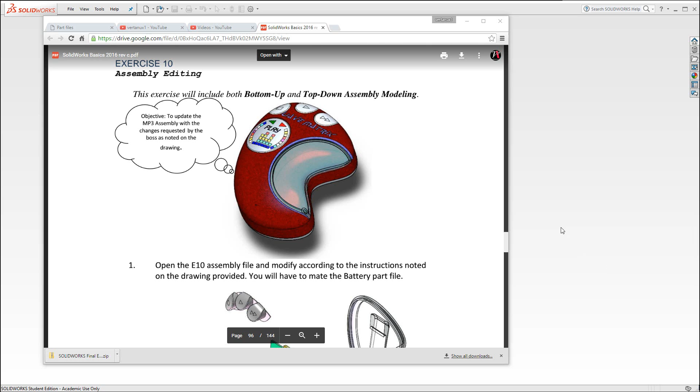So let's take a look at this. First, you want to grab the part files, found under exercise 10 parts, and just download. Once it pops up down here, it's taking a little time. Just hit the little arrow there and show in folder.

There we have the E10, and we could just select all the parts. Now, you don't need the E10XB, that's actually the entire assembly as a neutral file format, so you could deselect that one. Right click, cut them out, and we'll create a new folder here and call it E10. Then just double click in there and paste the files.

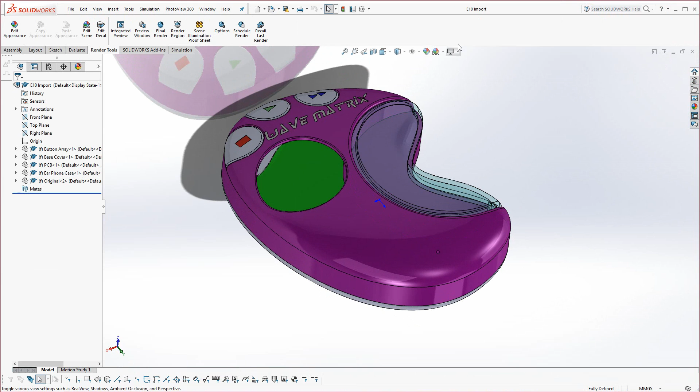So from here, what we're going to do is double click on E10 import. This is the assembly just unfinished. I'm going to turn off shadows because it's basically upside down a bit here.

So here we have it, it's an old MP3 player. Could actually be updated, I suppose, since no one uses MP3 players these days. But anyhow, this is a good example of how to edit something when it's unfinished.

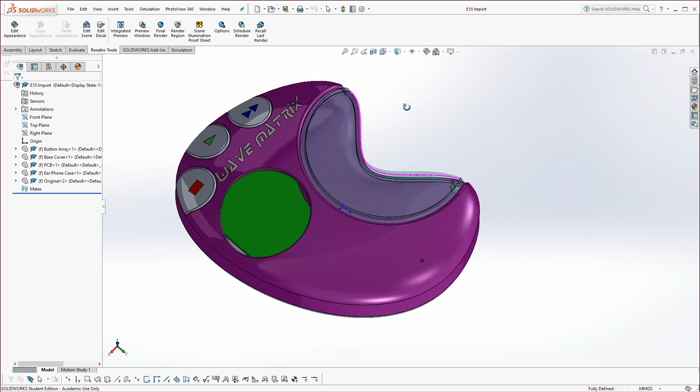If we take a look at the manual, there's actually just one drawing, and it's redlined and marked up. I also have sketches on how it's supposed to look, which is something you don't usually get from a boss. In this case, we look at some of the things he or she asks for: you can model the LCD screen, create this boss to hold the earphone case in position, so it swivels out, as an example.

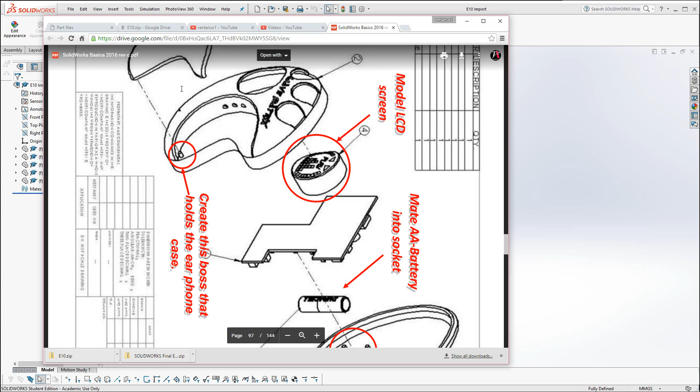But remember, this is kind of a widget. We're not going to go into all the engineering aspects, just more to give you a taste of what it's like to have to edit parts, going in and out of them constantly to finish them off, or things like that.

There's a little bit of bottom-up here. We're going to take a AA battery, which is provided. Over here, we're going to shell this back part out, put a lip around it, and then put those two, the cradle in on that side to hold the battery in position.

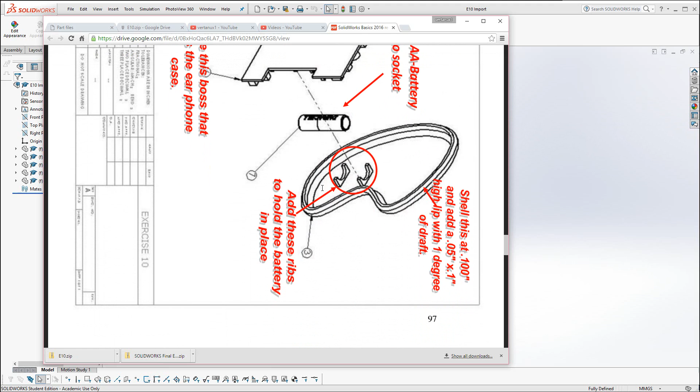So let's begin. Now that we have the assembly up, first of all we could rotate this around the back, and let's hide this part. Just right click on it, and you'll find a little set of eyeglasses, hide component. And here you could see the actual circuit board.

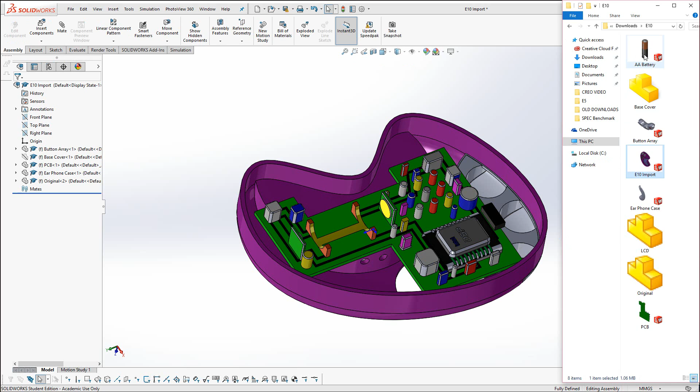Let's bring in the battery. So under assembly, go to insert components, or you could just go right here to the Explorer, and there's our AA battery, just drag it over. I'm going to go to hide/show and turn off the origins, because we don't really need to see them in this one, and the origins are turned on — they might be a little confusing.

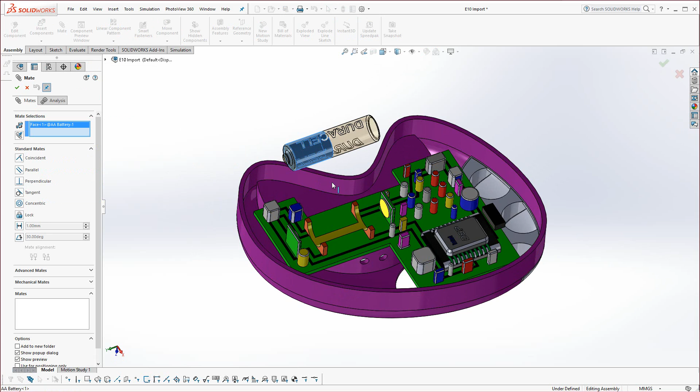Okay, so here I'm going to go ahead and go to mate, select the copper top of the battery, select this yellow cradle surface, and hit the green check. Now go ahead and select this end face to this face right here, and hit the green check.

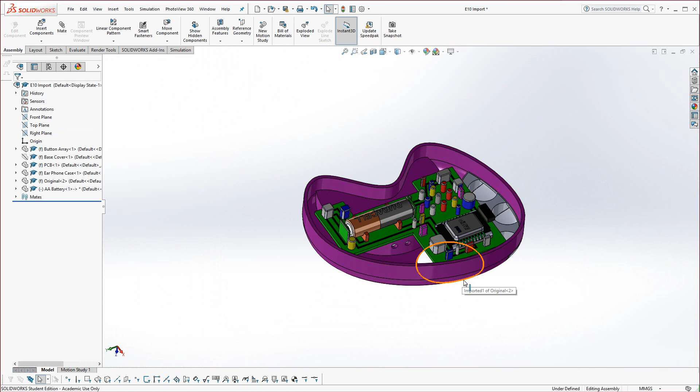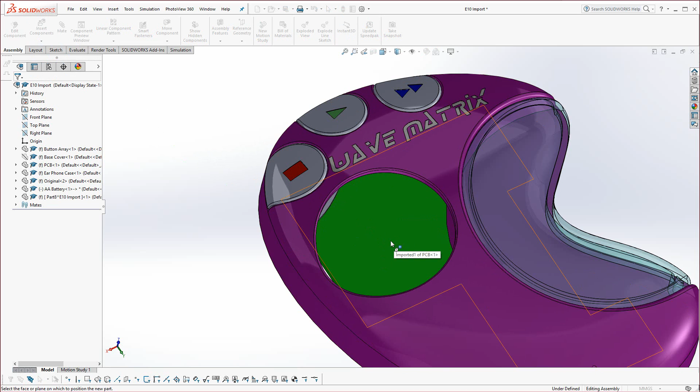Okay, the next thing we're going to do — that part's done. Let's try and build now the LCD screen. All it is is a solid block. We're going to build a solid feature that's going to follow the contour of the shape. So what you could do for that, go to Insert Component, New Part, click on the green surface through the hole, because that's the circuit board, and we want to draw it on there.

Select, and this is where you might want to go to Assembly Transparency and turn on Maintain Transparency. Once you rotate or zoom in and out, it'll take away the transparency — it makes it a little easier to see. You want to capture this edge right here, go ahead and select that inside edge.

We're going to offset entities. I'm going to give it a little bit of clearance, and let's set it to 0.05 millimeters, and hit reverse so it's on the inside versus larger in size.

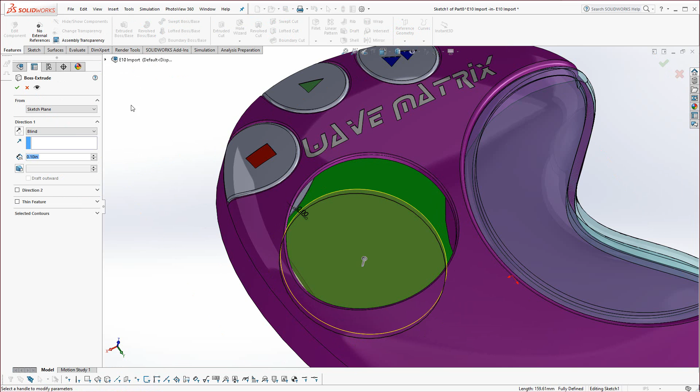We want it smaller. Now I'm just going to go to Features, Extrude Boss Base, and instead of Blind, select Up to Surface, and select this purple surface here of the MP3 player. When it turns pink, you'll see a preview showing that it is extruding up to the surface and it's following the contour. Go ahead and hit the green check mark, and that is our LCD screen.

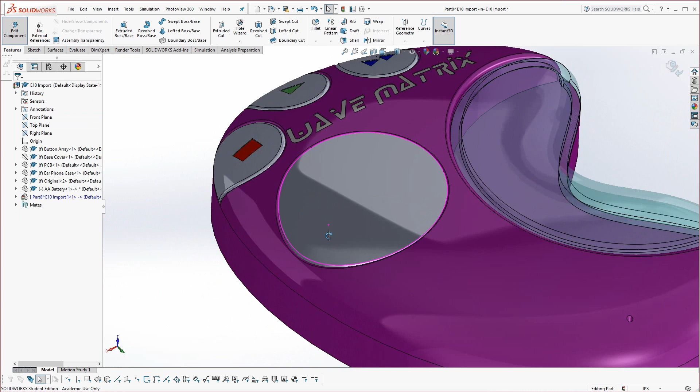Now we could just exit that component. Again, it's just to give you a taste of what things are. You don't have to put all the details in there. So we just essentially modeled a new part on the back side of that circuit board, putting in our LCD screen. Okay, the next thing we want to do is we want to address this area here.

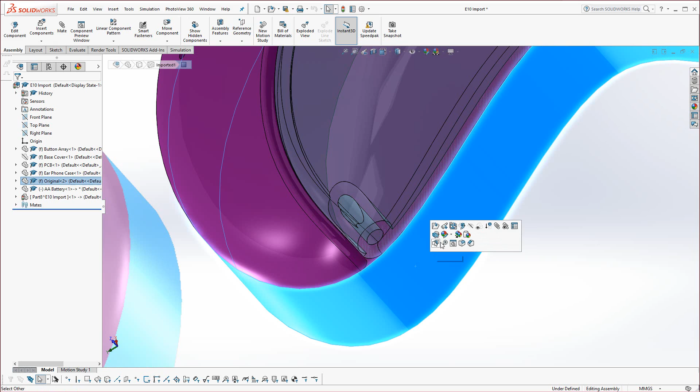Now we need to make a boss that fits in there. So let's edit this part. Click on this part, the purple part, and make sure you go to Edit Part.

Now you can select this face. Note it selects right through. It didn't select the glass shield there, but the earphone case goes right through. The Shift key would allow us to select that transparent object, but we don't want that right now.

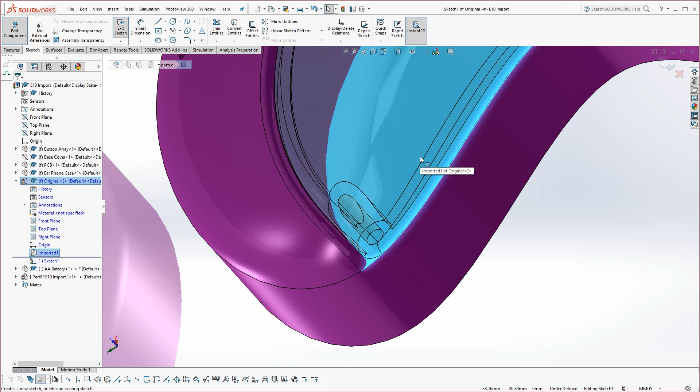So on that flat surface, start a sketch, and now you could hit the space bar and click on the front view or whatever view you want, and zoom up to that region there where you see the actual hinge needs to be. Okay, and what we need to do is we need to turn it to wireframe.

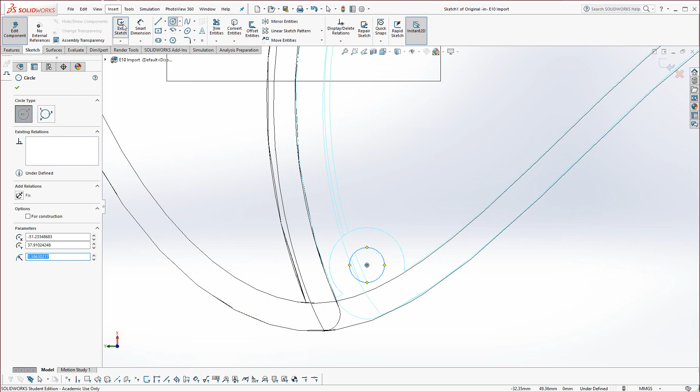Otherwise it doesn't work really well if you try and lock into those edges. So now we could go to circle, and we could wake up that center and just get to the center of that circle and drag this out until it snaps. Go to Smart Dimension, and you can see we're metric. Just set it to 3 millimeters.

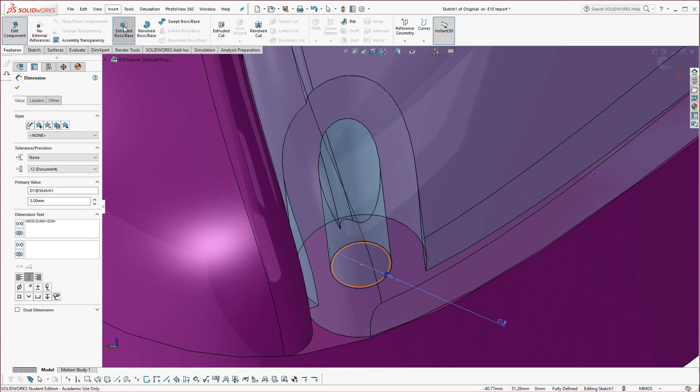And now we're going to go ahead and extrude that up. And we could actually go back now to Shaded with Edges mode, so you can see there we have the profile of the boss that we're about to create. Go to Features, Extrude Boss Base. And in this case, we want to go down to 4 millimeters.

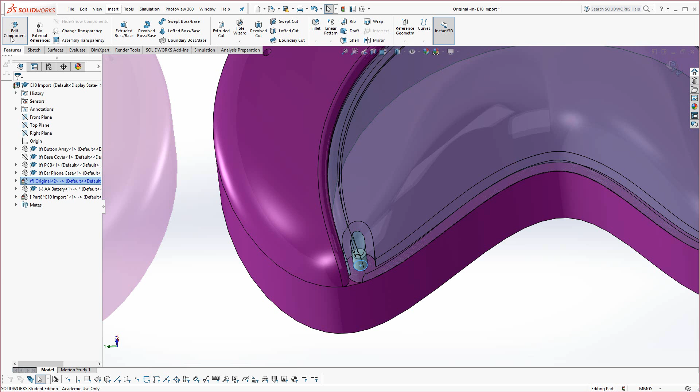Again, we're not going to get into the details of the engineering aspects, like to make a mushroom clip or different things like that. Again, it's just to give you an idea how to use the tools in here inside SolidWorks. Okay, now that we have that done, turn off Edit Component because we no longer want to edit that part. So that's completed now.

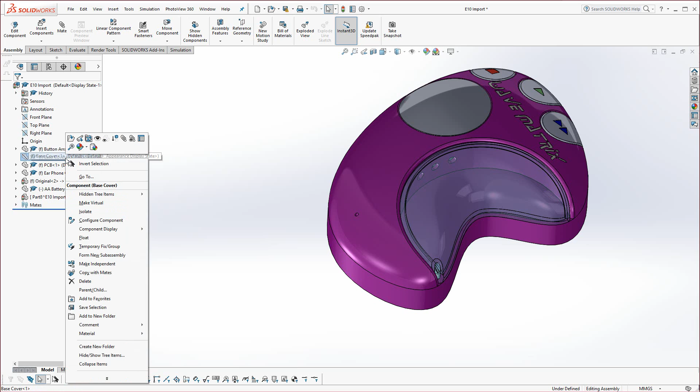The next thing we're going to do is we're going to go ahead and bring back the original 2. If we right click on that... let's see, we want to bring back, there it is, the base cover. So right click on the base cover, click on the show component, which is the eyeball, and now let's hide this part. Click on the purple part and hide that component.

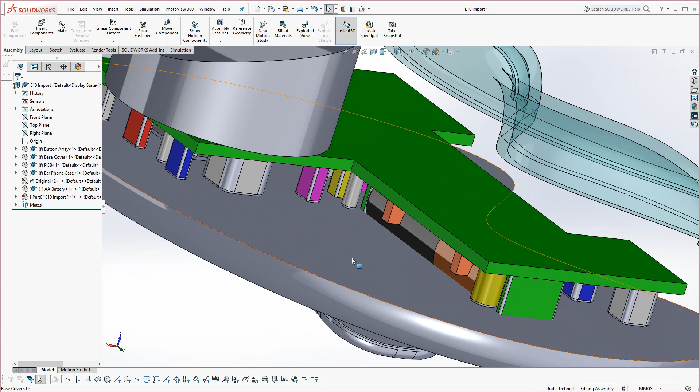We'll keep the circuit board in position, and actually we could keep the rest of it in position. We're fine. You'll see the battery is submerged partially in the actual model of this particular part. So what we could do here is let's shell it.

But first we have to edit that part. So before you go and try and shell it, if you clicked on it right now, if you try to look for the shell command, you won't find it. But if you click on it and then go to Edit Part, now the shell command will appear. Look at that, the base cover now shows up in blue for the text. Thus it's the one being edited.

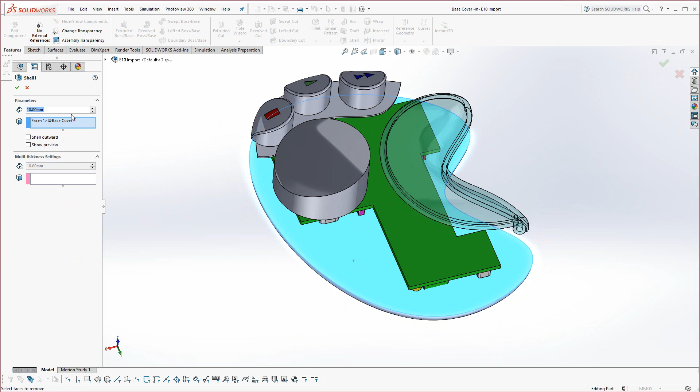So you could select this face again, go to Shell, and it's supposed to be 0.1 inches. So you could type 0.1, and you could actually type IN or the little quotes. Either one will work, and it will automatically convert it for us.

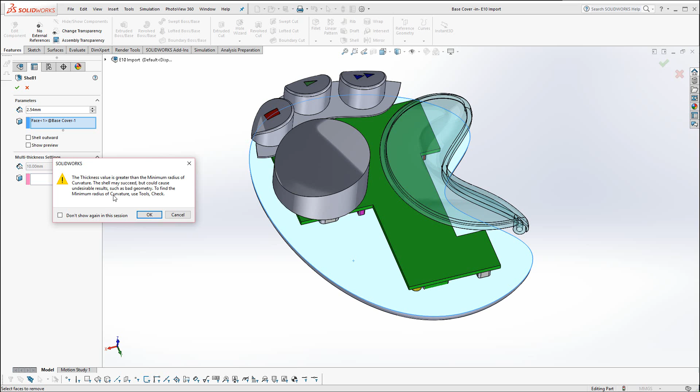Now you might get a little message like this. This is very important, especially with plastic parts. Even though if I hit apply here, it might go through and shell it, and it all looks great, the fact is sometimes the geometry might be, stretch the word, corrupted—meaning that if we were to try and make a cavity out of this for a mold, it might have some issues later on down the road. So let's go ahead and hit OK. That's all right.

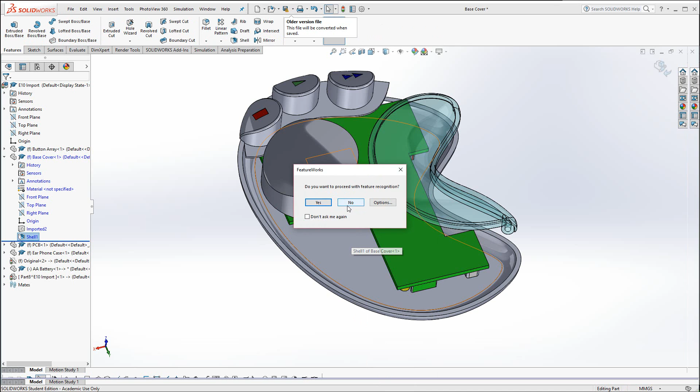Now I'm going to right click on the part and actually open it up by itself, isolating it temporarily from the assembly. It might ask you about feature recognition if you have that add-on, which recognizes features off of dumb solids. In this case, this is an imported model, but I'm going to go ahead and just hit no.

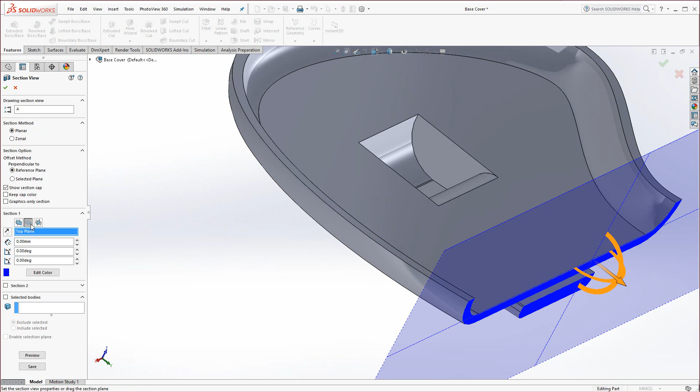And here you can see our geometry. Now what we have here is when we shelled this, it actually shelled out the belt clip that's on the back side, inside here. If we section it, go right over here to section, and let's select the right plane there. With section, you can actually drag through, and what we could see inside there is probably this region here might have some issues where it's kind of folding in on itself. Sometimes things like that happen. It might be that, may not, I'm not certain. But anyway, I'm going to cancel out of that.

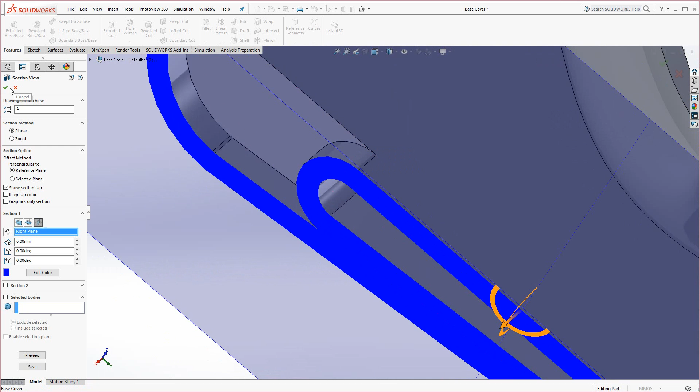So we want to fill that in. Besides, you wouldn't want that undercut there anyway if it's going to be plastic injection molded. Otherwise, you would need a special type of mold that would allow that to be made. To save money, we're probably going to fill it in. But if you fill it in all the way, those of you who know plastic molding, you're going to have a sink mark.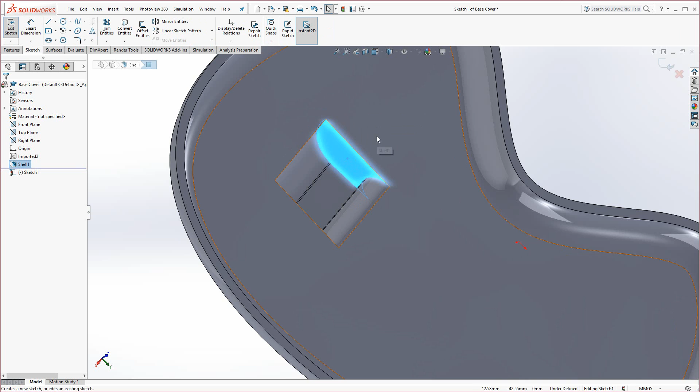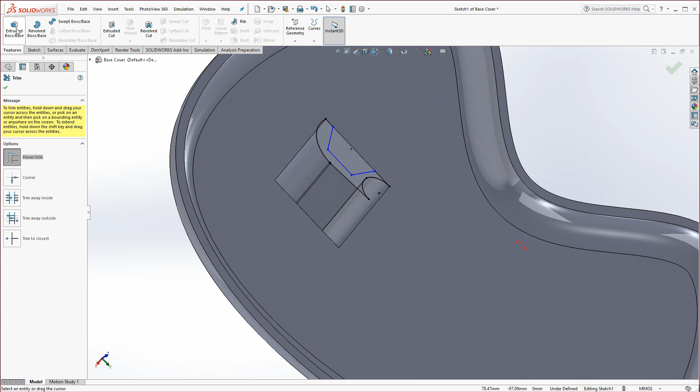So what I'm going to do here is select the side face and start a sketch, and I'm going to draw in a little bit of a core. Then I'm going to select this face and hit convert entities. You could go through and put in dimensions if you like, but now just go to trim entities, and I'm going to trim out right in the center there. Now I'm going to go to features, extrude boss, and just select this edge to go up to. Now we have a core that could be pulled easily from the mold, so we're not going to get sink marks, and at the same time it actually fixed that little issue where the undercut was.

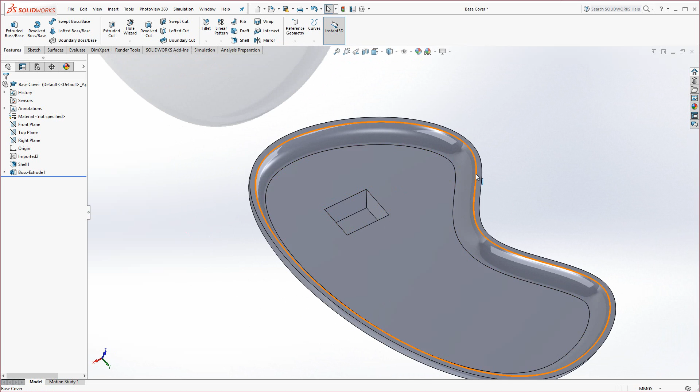Alright, so at this point, we now want to put, well, we have it isolated, might as well put it in this feature here on this surface. Select this face and start a sketch. In the drawing, the boss wrote out, wants a lip to go around here.

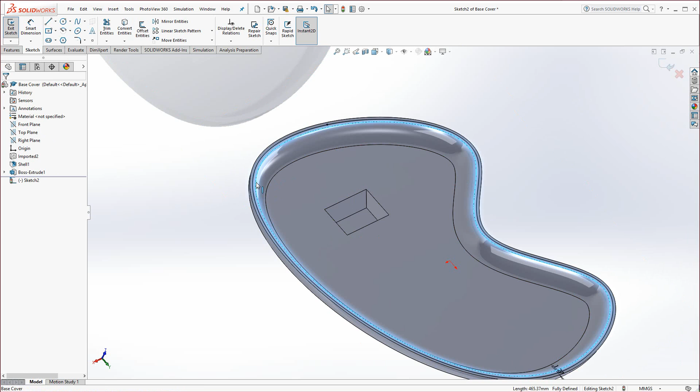And so with that face selected now, we could go to offset entities, and we're going to set it to 0.05 and hit the reverse switch. Actually it's 0.05 millimeters—it should be actually 0.05 IN for inches. And you see it's right in the center there, so you could hit the green check mark for that. And we could just select this inner edge and hit convert entities.

And we've essentially done what we saw happen in the last exercise, exercise 9. So we're making a lip the same way. Go to extrude boss. The call out is for some draft, it's a 0.1 in height. Now watch this, instead of IN, I'm going to type in the quote, or just remember, you could always go down here and change it. But I'm going to hit enter.

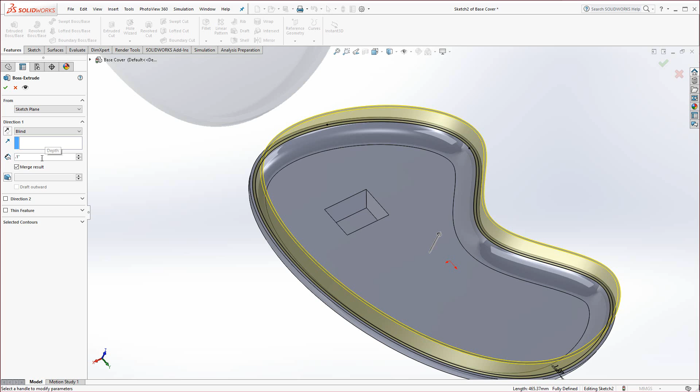Now if we want, we could put the draft in as specified by the boss. Let's see if it works. I think on this one I've had some issues from time to time, being that it's a freeform surface. You can put it in, it's just that I'm not sure if it extrudes with it on. Let's hit apply. And it did.

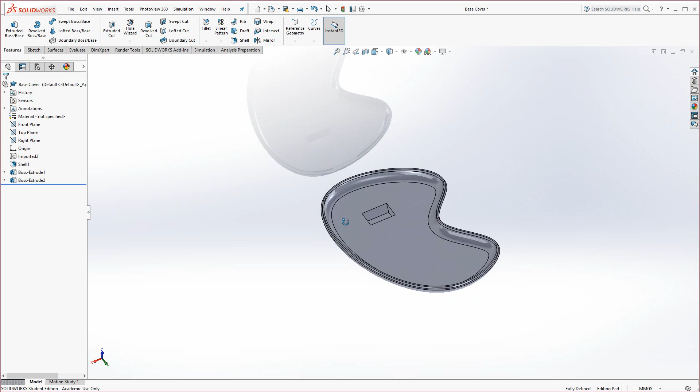Okay, so now that we have that, we're going to go now back to the assembly. So hold in control and hit your tab key one time, and it should toggle back to the assembly. Now just hit yes up here, we want it to update. And so we have our shelled component there.

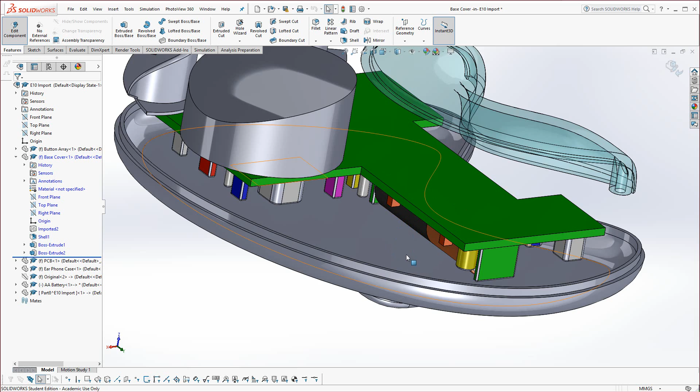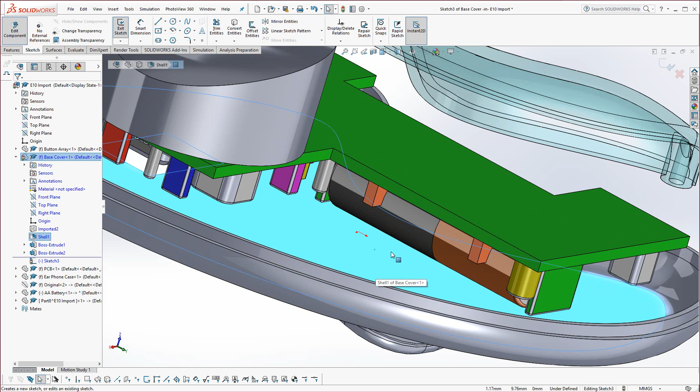Now what we're going to do next is we're going to go ahead and see these red posts that are sticking up. That's the cradle on the opposite side that's attached to the circuit board. We want to make a matching cradle that attaches to that on the other side, so it holds the battery securely when we put the back side on. So this is what we could do: select this face and start a sketch. We're still editing this component down below here. Now hit your space bar and you could go normal to.

And let's see the front view. Go to the front view orientation. All right, now that we're here, let's go to wireframe and look carefully where the battery is. Here's our battery outline. Okay, here are the edges of the cradles, here and here. We just want to match that.

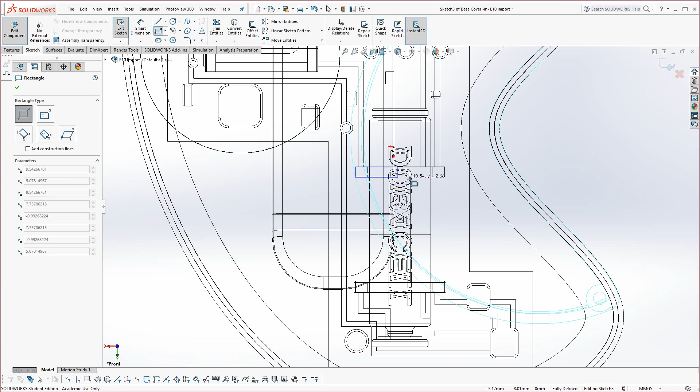Go to the corner rectangle, find a corner of a cradle bar and draw out over the existing one. That way they match perfectly. Let's go back to shaded. And now you can see, unfortunately this is blue, meaning I missed locking it in, but that's okay.

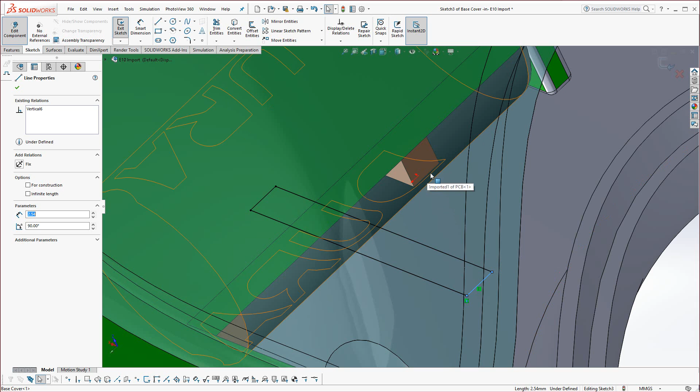I could go ahead and select this. Oops, not that point. Select that line and this edge of the cradle up top and make those collinear, and now you'll see that it's aligned. Okay, we can now go to Extrude, Boss Base, and select this edge to have it go up to and hit the green check.

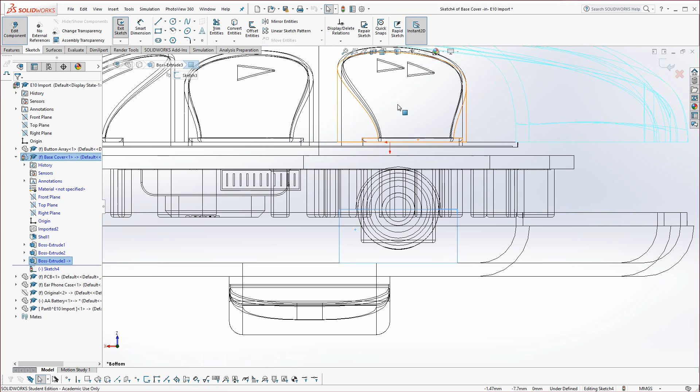And so now we have partially matching cradles, but we have to cut out the scallop for the battery. So select this face and start a sketch on it. Go normal to. We could actually go to this view orientation here. And again, let's go to wireframe. It's just a little easier to see. And there's the battery. See all the concentric rings.

Now take the circle tool, locate the center of the battery, drag this out to the largest extent, and see that where it ends right here, that is the cradle on the opposite side. We want to have a little clearance. As the batteries get hot sometimes, they might expand. You always have to allow for that.

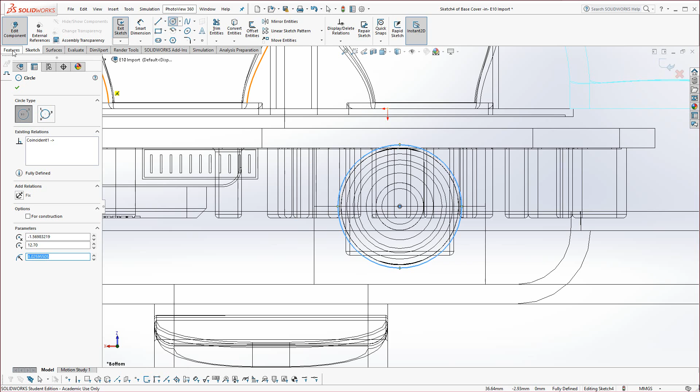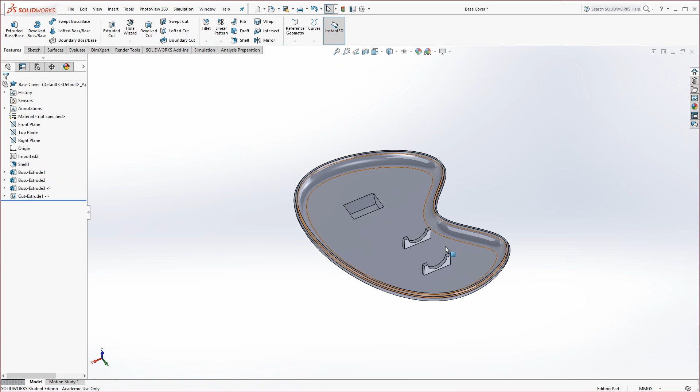And now we go to Features and Extruded Cut. Let's change it back to Shade with Edges. And now just have it cut up to the back edge on the opposite side of the cradle. And if you want to see what that looks like, Control and hit Tab. And now you can see it's updated and we have our cradle on this side.

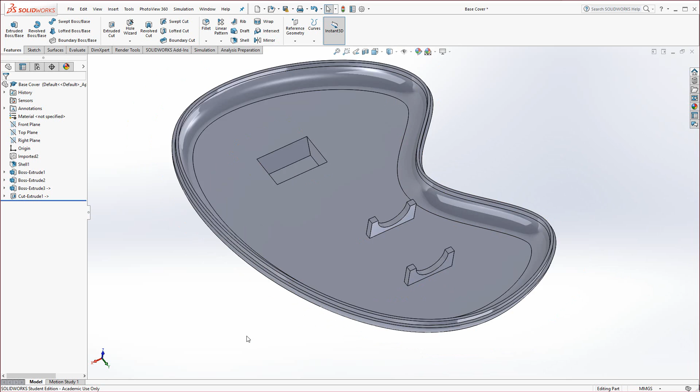Now if you think about that, that's pretty impressive. We didn't really use a whole lot of dimensions. We actually just used the geometry off of the other models. Again, this is the top-down capabilities you have. And imagine trying to dimension to this with all these curves. It might be a bit cumbersome. We saved a lot of time. We did this in under 18 minutes.

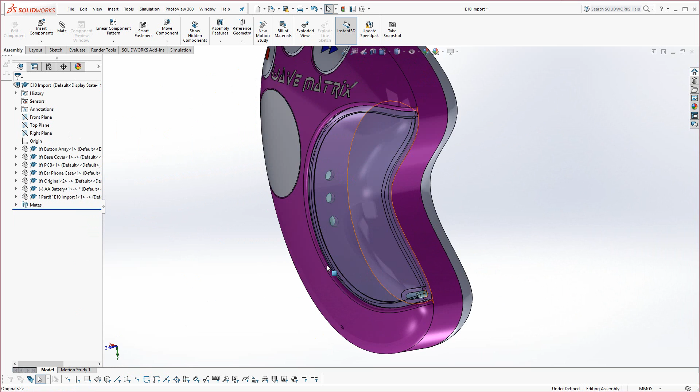So let's bring back the other parts. First of all, I'm going to turn off Edit Component because we're done editing it. And let's bring back the original. And now we could explode it. Just go to Exploded View, select this part, drag it forward, select the lens that we made, drag that forward, select our rear cover,

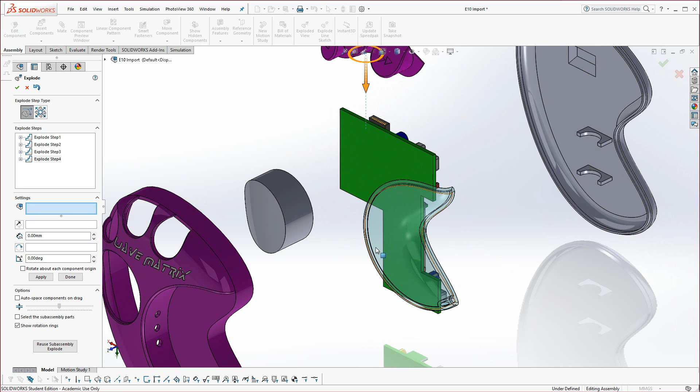and we could click on this and actually drag the button array up. And then if you hold Shift, you could select the transparent object or just move it away from other entities. And then there's the battery. Click on the battery, drag that back.

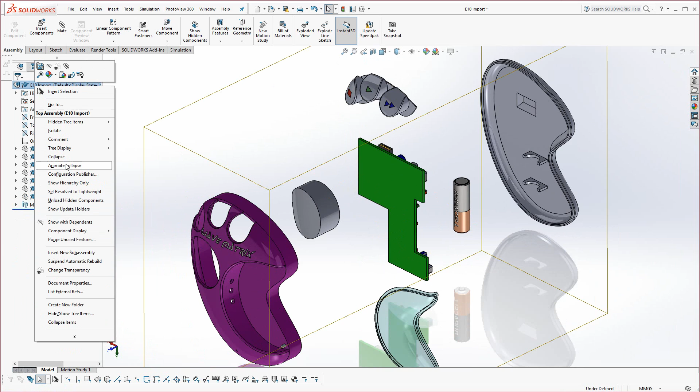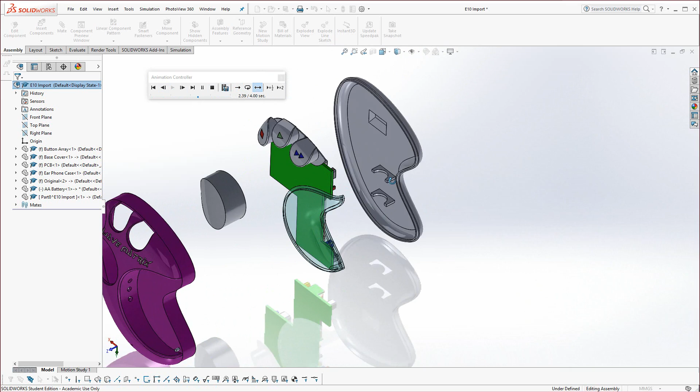And now if you hit the green check mark, right click on E10 import, we could go ahead and animate the collapse. And up here you can see the animation controller. If you set it to reciprocate, it's pretty cool. You could record the video, put it up on YouTube, do whatever you want. And you could rotate it too to see what's going on there. And that completes that exercise.

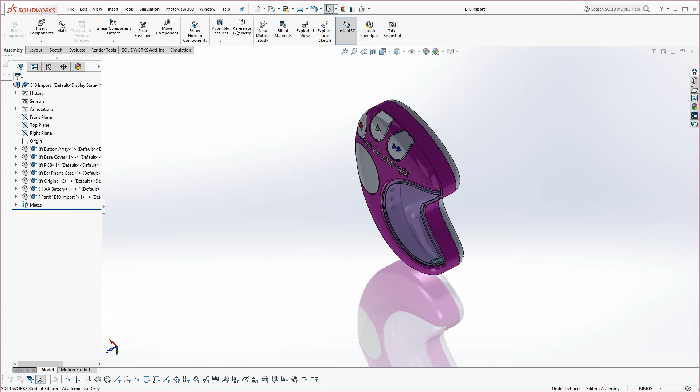Now, the lab that comes after that is the E10 Turbine Filter. Okay, now with this lab, again, give it a shot on your own if you like, otherwise I'll go through it right now. Start a new part file. Select the front plane, start a sketch, use the center line tool, and this is nothing more than a revolve feature, a very complex revolve. So there's a lot of great sketching exercise in this one for you.

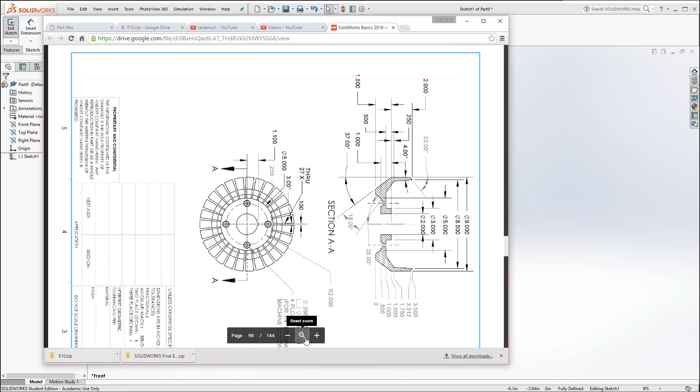And what you want to do is when you look at the drawing, just see here, this is essentially the section view we're looking at. Let's zoom up here a little bit. Now be aware right here, these are holes, so those are going to be filled in. So you could essentially draw this profile and add the dimensions to it.

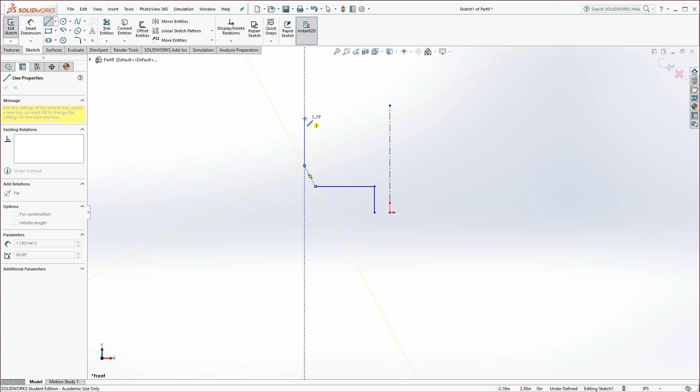So I'm going to take the line tool and infer to this, drag this up, across. I think it goes something like this, at like an angle. Don't lock it into a 45. I think this is vertical. Then there's a little angle off of this one, and another angle off of that, and another one over here. Comes back around flat, then back down, and I think it just connects. Okay, so it looks something like that. That's what you start off with, and let's verify that.

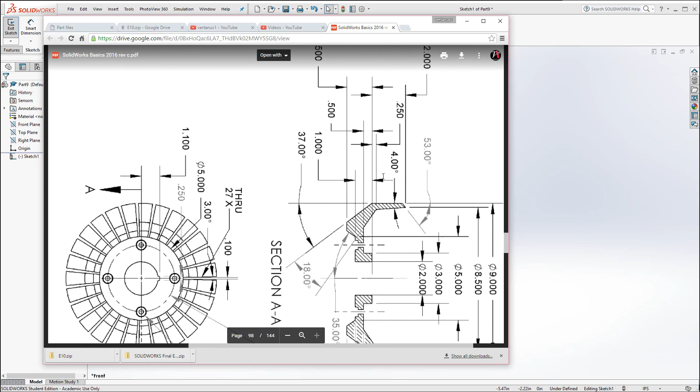Okay, from here you just have to add the dimensions. There's lots of angles, actually more dimensions than you're going to need to put in. Be aware of that, because over the years I've seen students use this. For example, all these dimensions here. If you can't get it to fully constrain with what you see there, add some of these in off the bottom edge.

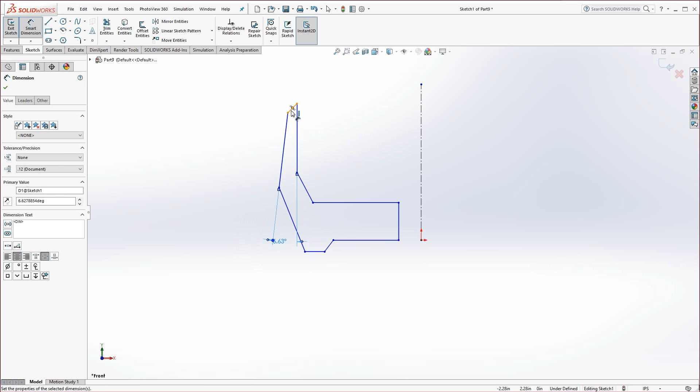I'm going to go ahead and just leave it as is, but beware, you could go in and essentially just add angles on everything. You're just clicking from here to here, putting the angle on there, whatever the print specifies, from here to here. Whatever the print specifies, you're going to put all these different things in. There's lots of angles.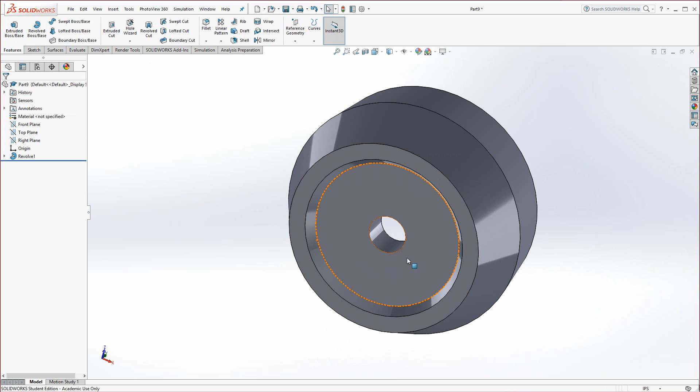It's very difficult, give it a try. But now I'm going to go to Features and Revolve Boss Base, and it revolves around. Now the hole wizard, you could select this face. Oh, you don't need to start a sketch, my mistake there. Select this face. Actually, let's go normal to that.

From here we could go ahead and put in the hole wizard. This is nothing more, this particular one. If we look, it's the 1/4 inch binding head screw. See, it's in parentheses, so you don't have to put in those exact dimensions. If you just select the 1/4 inch binding head machine screw, it'll have all that. So over here we have the counter bore and binding head screw 1/4 inch. Look at that, it's the default that I have.

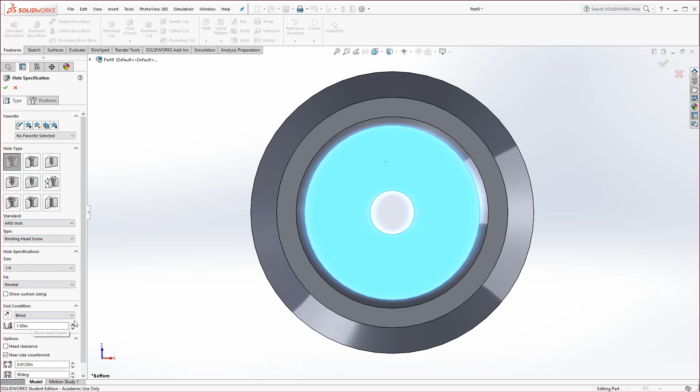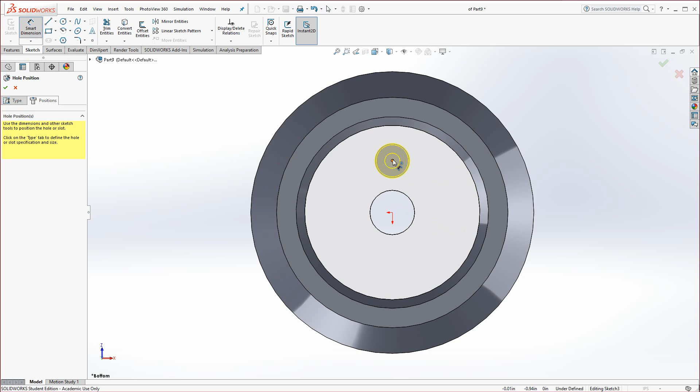And for the depth, we just want to make sure that goes through all. Then we could go to position and just locate it. Drop one in. You could put all 4 if you wanted dimension, or it's a good challenge to find out how to actually pattern this. So I'm just going to go ahead and hit Smart Dimension and dimension that to the center.

Let's take a look at our print. It's on a bolt circle, which is called out at 2 inches for the diameter. So this will be only 1 inch. And of course, because I didn't add any dimensions, it doesn't fit. So I'll go back to 1 inch here.

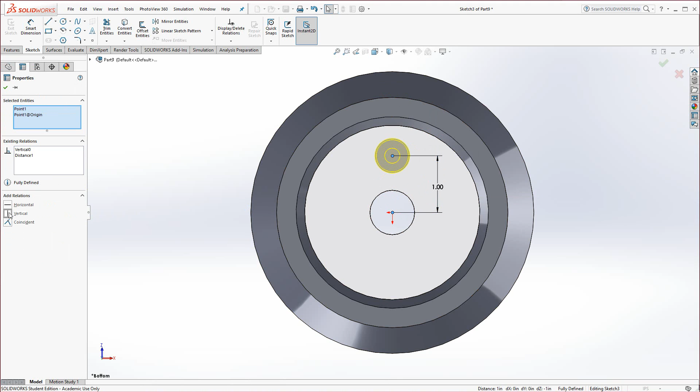Enough said. Hit Escape, click on this and this point and make them vertical. Just hit the green check mark to apply. Now you could go ahead and select this counter bore, go to Circular Pattern, select any of these faces. Oops, don't want the whole revolved pattern. Go up here, select any of these faces, and just make sure it's equal spacing. That little checkbox has to be turned on. 4 instances, 360 degrees.

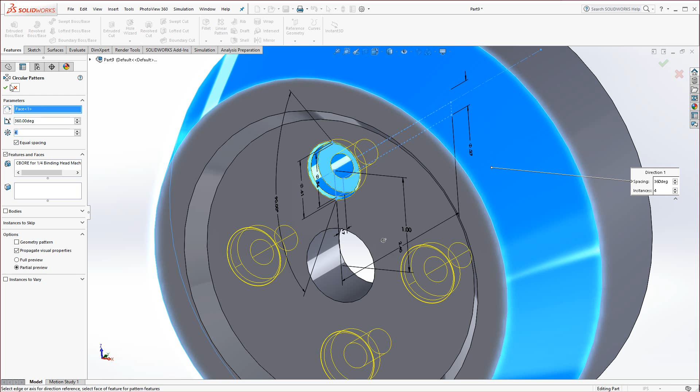As far as the little cutouts go, you could select like this face and start a sketch. Oh no, not edit sketch, wrong. Click on this face. There we go, go normal to it. And essentially you're going to make a center line.

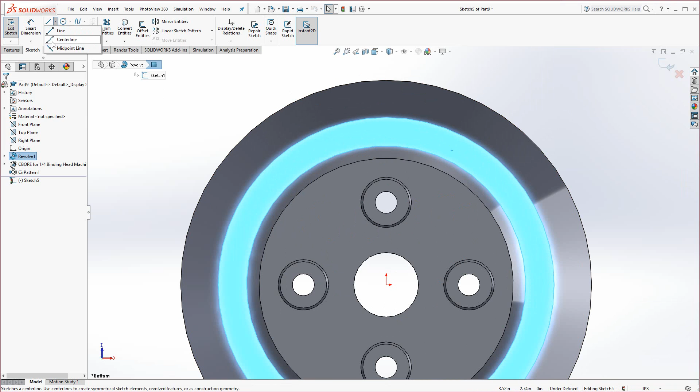And then go to the line tool. From the center outward, you could go ahead and connect this if you like, or make it come up a little bit higher, either way. And now just mirror that. Select it all, go to mirror, and now you could add that dimension. Actually, yeah, the dimension up at the top, I believe, is supposed to be like 0.1, something like that.

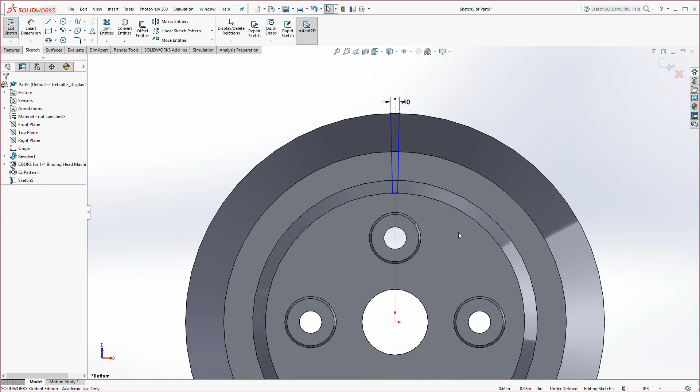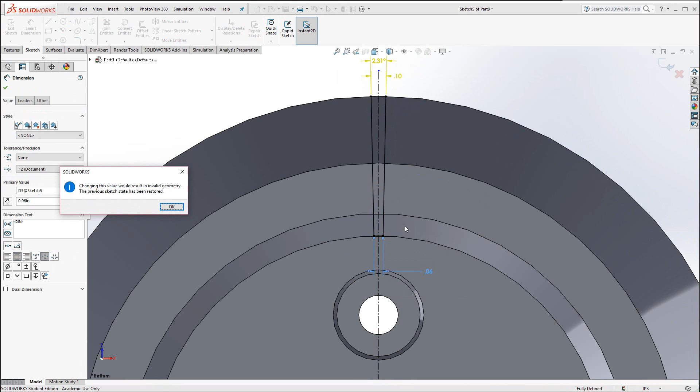And then select this edge, because that's the depth that it goes, and hit Convert Entities. I use the trim entities to trim that out, and then this, and then this. Now turn blue, you'll probably have to redefine this with another smart dimension, or angle actually, put an angle in. Okay, specify whatever it's supposed to be. And then actually if you define the base, cancel that, we had enough to begin with.

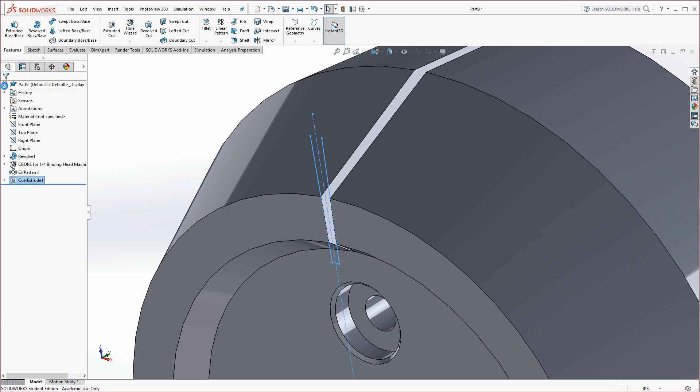Let's just hit undo there. Okay, now I'm going to just cut it through. Go to Features, Extrude Cut. Make sure the arrow points inward so it cuts everything inside, and through all both. Hit the green check, and it should make the little cutout in there.

And with this one, it's just like we did last time. Circular pattern. Select the outer face, and 360 degrees by however many are specified in the print. And it's done.

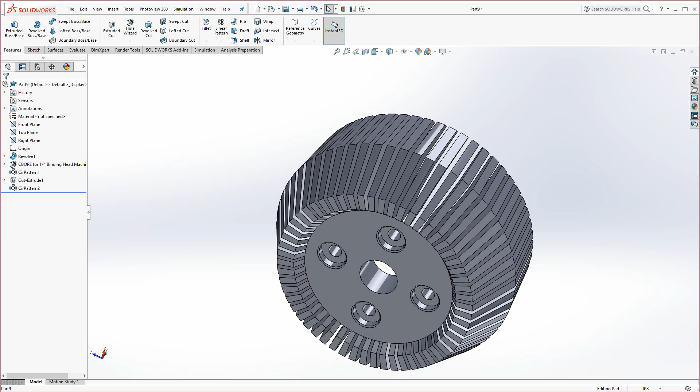That, and again, make sure you put all the dimensions in. It's an excellent exercise for you to practice on. I'm not going to go through them all in this video. At this point in time, you really need to practice those. This concludes exercise 9.